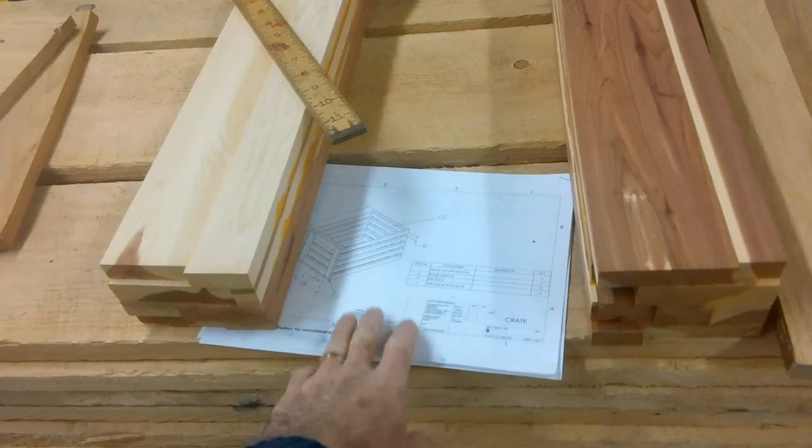We've got prints here for the crate we're building. I'll show you one of those in a minute. These are going to be cabs for the bulldozer. You see these have been planed down and laminated together. This happens to be some cedar that was donated to us. It's going to be really cool looking when we get it machined up. So those will be the cabs for the bulldozer.

If I run over here, more cabs for the bulldozer. These are finished planing, just like the other pieces were.

In our glue-up area, our clamps are all set. These are all glued up - these are the cabs for the tractor trailer. They just got glued yesterday afternoon. That student has more stuff over here, 4 more boards, all glued up as well. So that's coming along nicely.

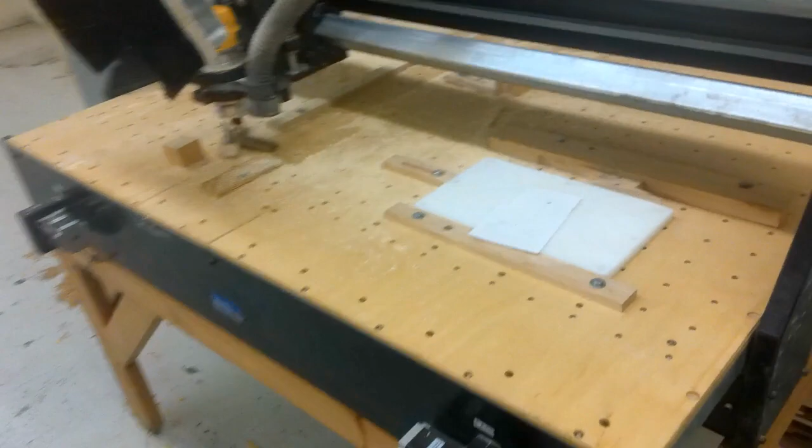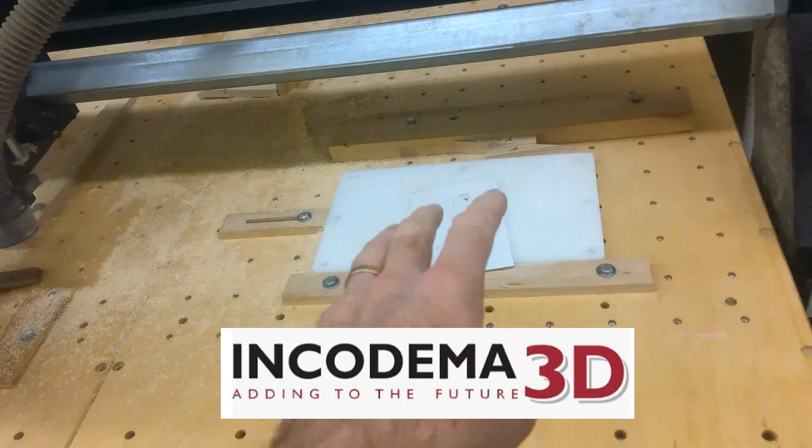If I come over here to our router, it's got 2 projects going at once. We have to do 2 different G54 offsets for our projects here. This project is a cutting board, something we do every year - we've been doing it for years. Incodema 3D in Freeville, New York gave us a whole bunch of this plastic, and we make cutting boards out of it. It's HDPE, food grade plastic, and it's just an amazing project, a really good introduction for CNC work.

My freshmen do this. We're right in the midst of programming that now. They should be machining later this week. On the other side of the table, the router is set up to make the wheels for our tractor trailer. There's 10 wheels per tractor trailer. I know it's supposed to be an 18-wheeler, but we've got to make about 160 wheels so that everybody gets wheels. So this is happening here.

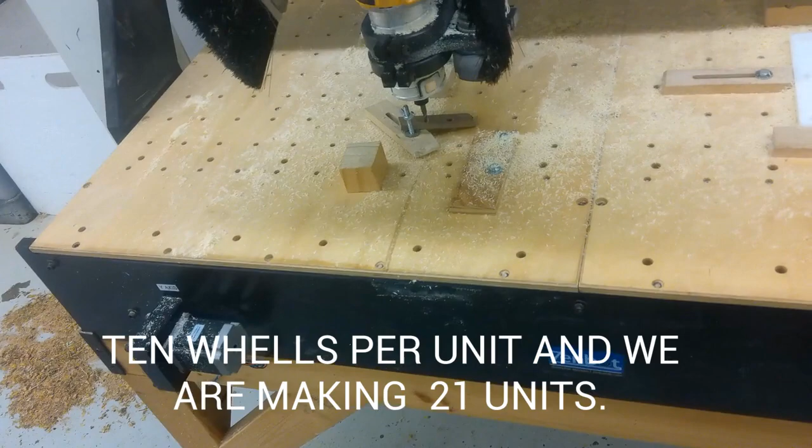We just made our first wheels yesterday. What we do, probably a bad process but it works well for us - we don't have a spoil board or a magnetic table, so we machine most of the way through, or halfway through. Right now our file's screwed up. We worked with OptiPro, they helped us yesterday with our post to get this to set right. It was actually part of our machine definition that needed work.

So this is going to get fixed. What we're going to do is machine about halfway through, a little more than halfway if we can, then finish it up on the bandsaw. It takes the student about 2 minutes to rough this out. Then we'll drill a hole in it - lay out and drill a hole. Once that hole is drilled, we'll make a jig or fixture for the sander and just clean up the edges. Works really well. So these are the wheels - that's our first one, 159 to go.

Pretty exciting. If I come over here, we're going to find other projects going on. I forget what this is - these 2x6s need to be machined down and planed down. It's going to be the back of the lowboy trailer. There's a step up on the lowboy trailer that has to happen, and that's going to be for that.

Here we've got some finished parts - these are pretty cool, these are bumpers. This was scrap wood given to us by somebody, it happens to be a piece of black walnut. So we have bumpers for the back trailer. We're going to use our laser engraver to engrave 'oversized load' in here. Hopefully that turns out well.

This is part of the trailer coupling for where the trailer is going to go. It sits like this on the trailer, matching the angle of the trailer deck. Then another piece attaches where my thumb is, which allows the trailer to go together as one solid unit. We've got our fifth wheel holder here.

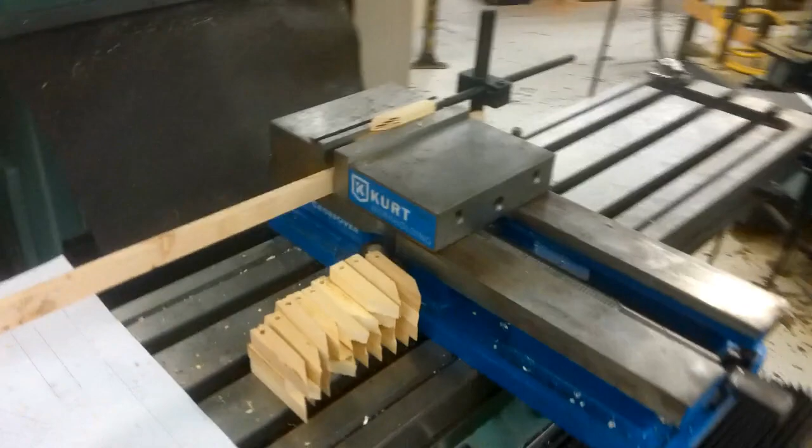Over here in one of our Trak machines, we set up this part - I forget the name - but it's moving along nicely. These are little brackets that'll go between the push arms and the blade of the bulldozer. He's drilling holes, then he's got a machine on a curve coming up next.

This is all scrap wood that was donated to us by Stakmore. Unfortunately, they're no longer in business. They were a great company, made all sorts of folding chairs. That was pretty cool.

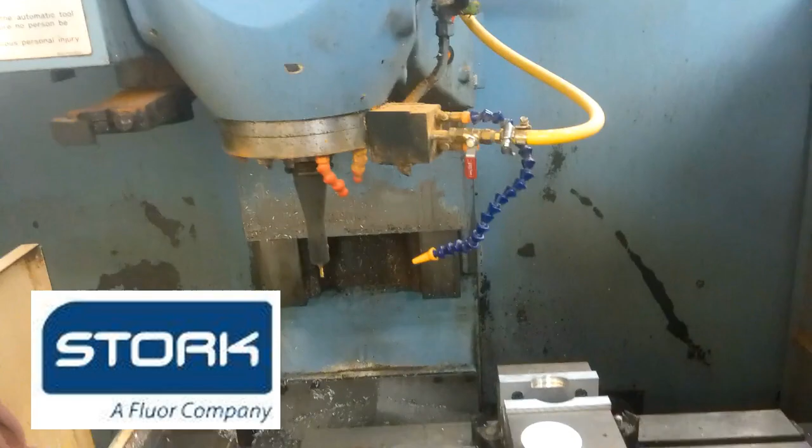If I run over here to our OKK milling machine, donated by Stork out of Ithaca, we got these discs that were given to us by a company in Lancaster, New York. Casey Machine Tool gave these to us - a whole bunch of scrap discs they had left over from a project. We're going to machine off the flat and machine a student's initial into this.

As you can see, the vise here has been machined out so it fits this really nicely. That'll get tightened in, and then we'll machine off the top, making basically some kind of paperweight with their initial in it. They can make more than one of these if they want - we've got a lot of that material.

We run over here to our manual lathe, one of our manuals. Oops, let's stop here first. This student's boring out a hole in a piece of half-inch aluminum, which is going to be the exhaust pipe for our bulldozer. This is one of the pieces that's done - it's got a hole drilled in it.

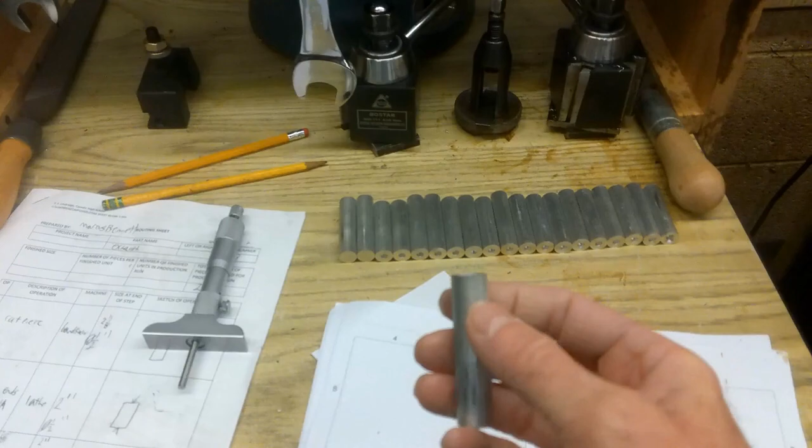All he has to do now is put it in a collet block, and we're going to machine a 45-degree angle on that to match our print here. So this is coming along really nicely.

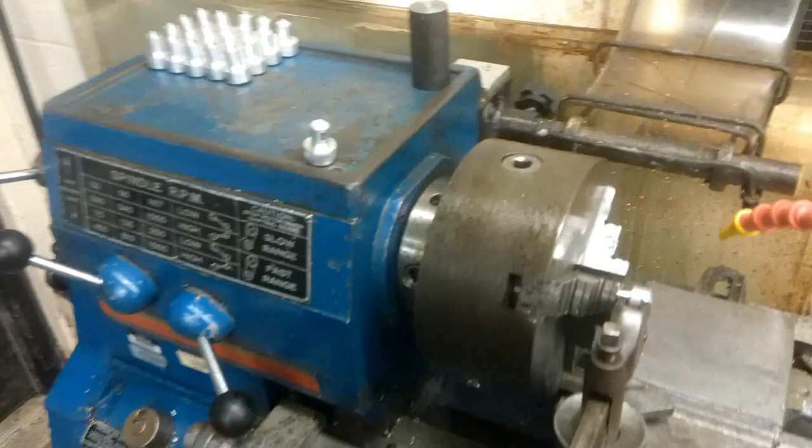We have another student that spent a lot of time on our CNC lathe - you saw that in another video. What he's done now is taken this part, our air cleaner, and he's knurling the edge to make it look like a real air cleaner. I hope this shows up on video. It's coming out really cool - he just finished the first one yesterday.

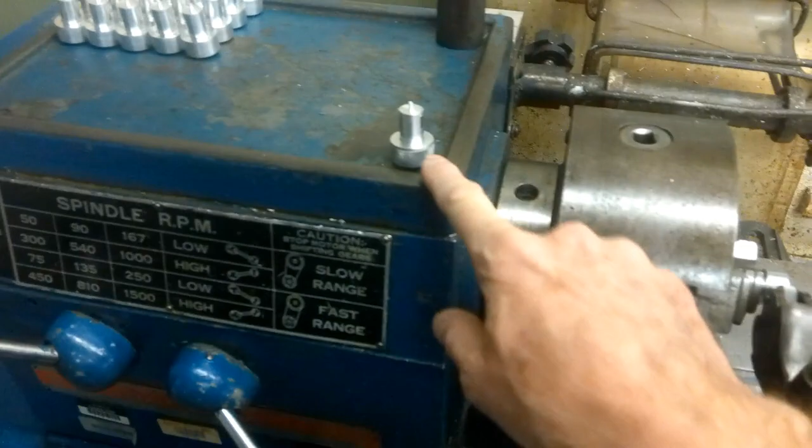Got a little tweaking to do. I was helping him with that and I messed up a little bit, didn't get our knurling tool square, but we're going to get that fixed today, and he's going to make a bunch of those today, I hope. He finished those on our CNC lathe.

Over here on our Milltronics VM24, the part's not in it right now. What this student is making, using this setup, is the right and left bulldozer tracks, as we're calling them. That's being done in this machine, and it's coming along really nice. We'll show you those in a minute.

This will be a 5th wheel mount - this little pile of lumber here. He just got these jointed up, so we're going to rip this and cut them. This is a rough length now, something that's easy for us to joint. It'll get ripped and then cut in half, and that'll become the 5th wheel, actually the gooseneck for the trailer.

So we're going to make a CNC program out of this to cut this out, so it's going to come out real nice. Over here, some of our scrap wood.

This is scrap left over from chairs we made last year, and we've got a whole bunch of it, so we rip out the defects and glue it together to make solid panels, then rip it into parts. These are slats for crates we're making. I'll show you one of those in a second.

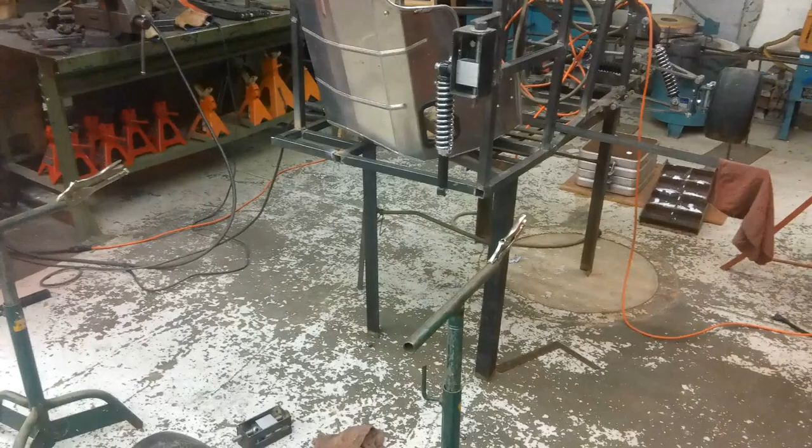Over here, our go-kart's coming along nicely. We don't see a lot of change, but there's tons and tons of work being done here. A lot of little layout, tweaking, and fixing—this is really coming along nice. I'm excited to show you the progress of that.

If I take a step past the go-kart into our foundry area, we just poured yesterday. You'll see a mold here with a small piece and a bigger piece in it. I think they came out really well. The pour went awesome yesterday, that was really good. So that's all done, and hopefully we can make progress with that.

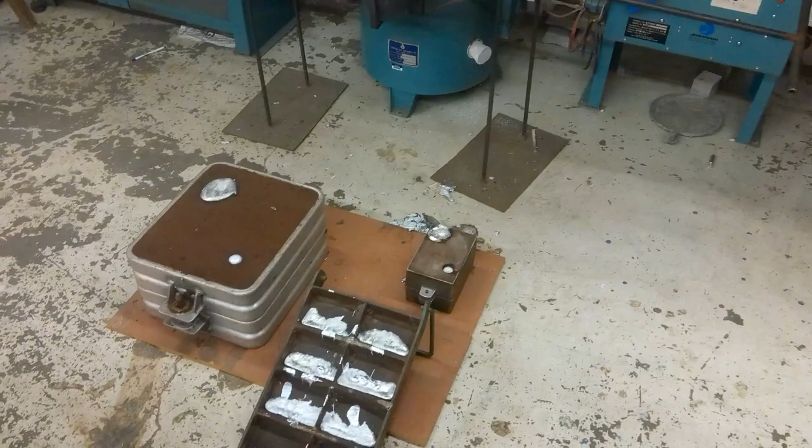If I run over here, our CNC lathe just finished up. You saw parts, the air cleaner, that just got finished up yesterday. Finished making those parts, so they're done, and it's moving along nicely.

Here's some more Stakmore chair parts. These little pieces right here are parts for the crate we're making. The crates we're making—these are 4 of them stacked right up. The only thing they need yet is the bottoms put in. Right now we can see right down through the bottom, but they'll have bottoms put in them. Same slats as the ones on the side here will go on the bottom. The part I showed you just previous to this are for these slats, and they'll just get ripped in half. They come out really nice.

Again, this is all scrap wood, stuff that we'd normally throw away, or it was donated to us. The frame here goes around the outside—that was lumber given to us by Stakmore. Stakmore unfortunately is no longer in business, but I really thank them for thinking of us and giving those pieces to us. It's made this crate a completely free project to the school, other than a little bit of glue and some air nails.

Over here you can see some frames being put together. So here's one of our end frames. You see our air nailer here, and some more slats, ready to go together. So these 2 pieces will be put together in a framework, and those slats will attach them.

Over here you can see that we've got a frame that's almost done—3 sides are done, the 4th side needs to be put on. There's 2 frames without slats. So things are moving along nice with the crates.

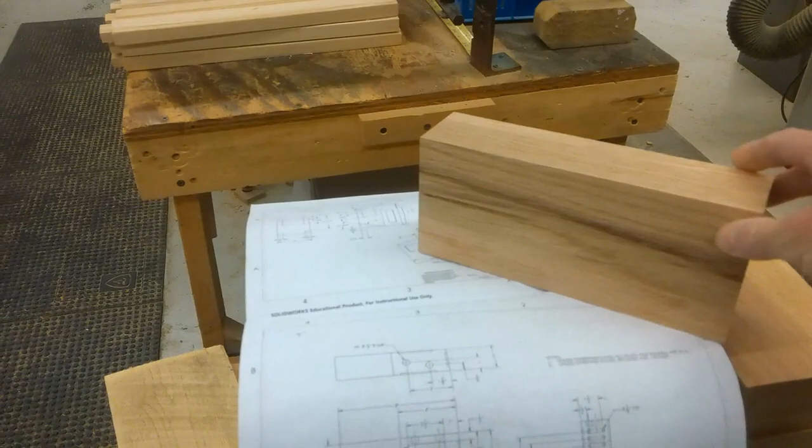Over here, these parts just got finished yesterday or the day before. These are rough stock for the engine for the bulldozer. So we've got a glue-up here—it's a lamination. This was scrap wood left over from the panels that are here, those study carrels from Ithaca College. They got ripped into boards like this. This is a glue-up, and this is going to be the engine for the bulldozer.

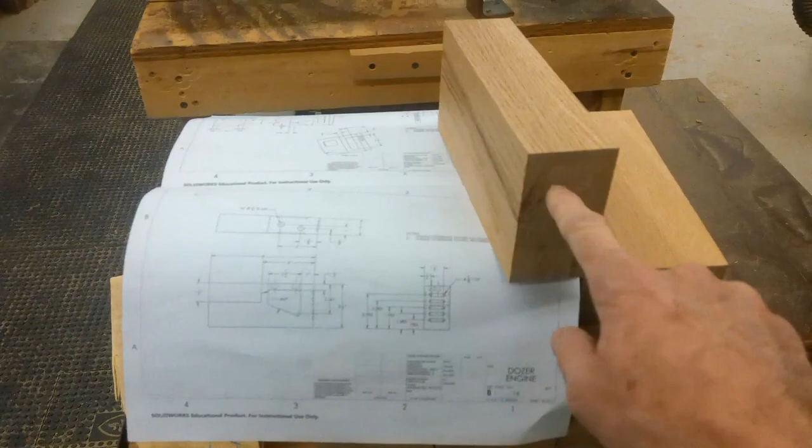There's the prints for it. Got a lot of CNC machining to do. There's the radiator to put in, and you'll see the motor over here, and the motor over here. Then we've got to make a cutout here to let the bulldozer cab sit in.

The cab's going to be made out of that cedar, so we'll have a red oak engine and a cedar cab. There's going to be some maple hydraulic tanks on each side. It's going to look really cool with the different lumber in the setup.

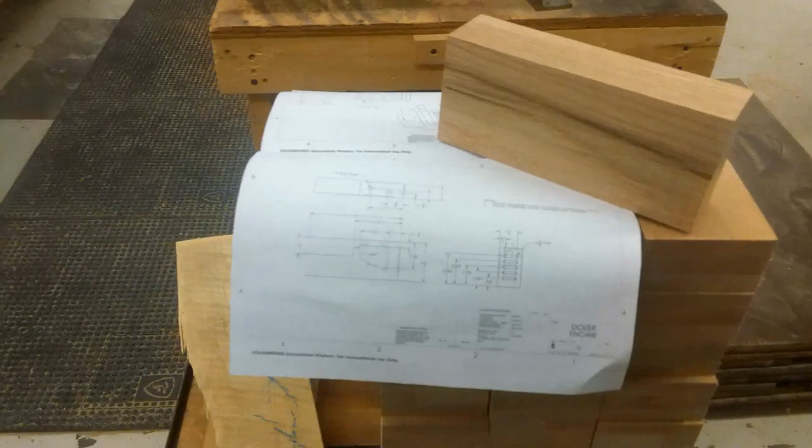One more stop, or two more stops I should say. Here's the left bulldozer frame, as you can see it's been machined. That was going on in our Miltronics, and it was really cool how that turned out—we'll try to get a video of it. This is the left side; we have to make a right side as well, and these are all getting machined in the Miltronics. Right now he's just touching up stuff with a sander, and we're going to finish up the faces of these hopefully today. They're coming along really, really nice.

Last project I'm going to show you, then we'll jump in and look at some architecture. This table is full of all the parts we need for our machinist chests—these are all the drawer pieces, all machined, again out of that study carrel stuff. We're able to rip out the defects and make those into parts. And that pile of wood on the cart, those are all the boxes, or the cabinet portion, of that machinist chest. They're coming along really nice.

There's another part here in one of our Trak machines. This is that 5th wheel frame I was telling you about that goes on the framework for the truck. What he's doing now is edge finding so he can find the center of a hole he has to drill, where the kingpin's going to sit. That'll get glued and screwed to the frame of the truck, and then the kingpin will sit in the hole. We're real excited about that.

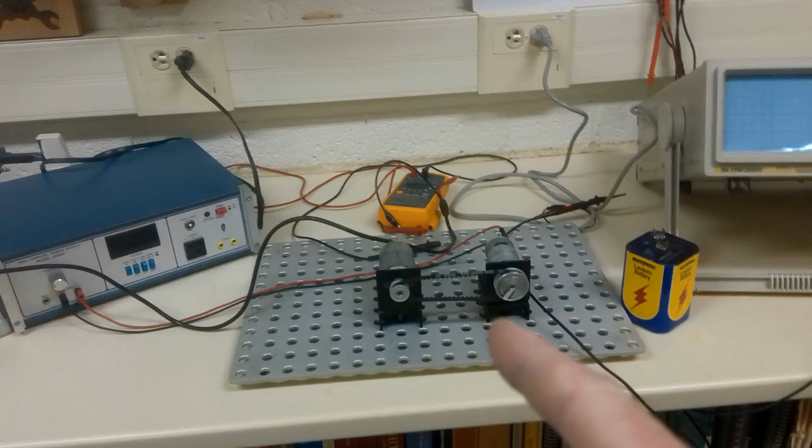Just yesterday in my applied physics course, we were looking at how electricity works and how electrical generation works. We took a power supply, ran it to an electric motor, spun a belt, and measured the output of that generator—basically turning a DC motor with another DC motor. We measured that output on our oscilloscope so we could see how DC power looks.

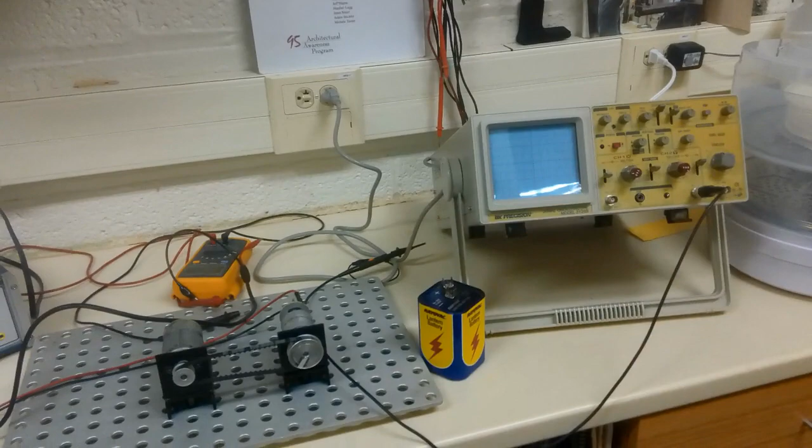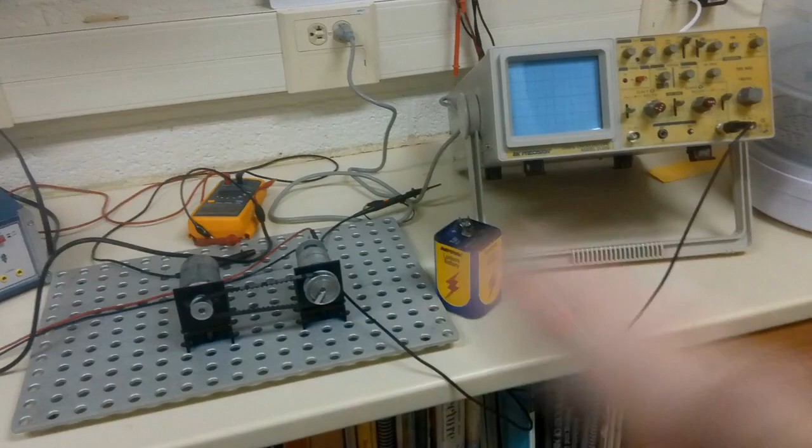It makes a really cool little bumpy line because as the magnet and the coil of wire spin together, it does that on the oscilloscope, which is really cool. We also used the oscilloscope to measure the voltage of a battery and see how DC voltage is just a straight line—it can be positive or negative depending on how it's hooked up or made. It's really cool how that works.

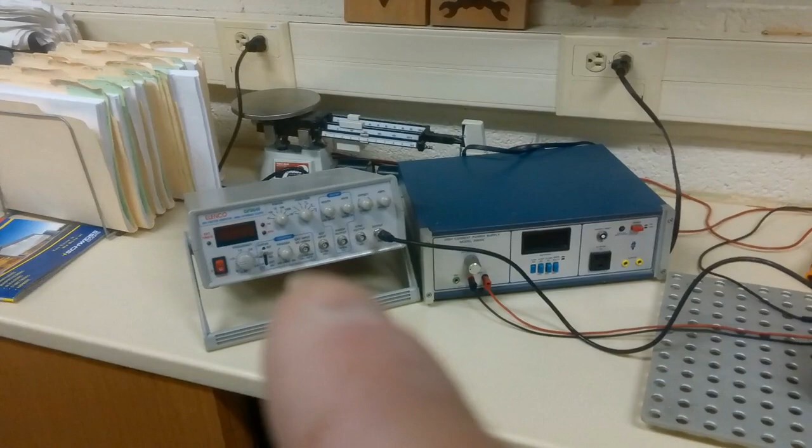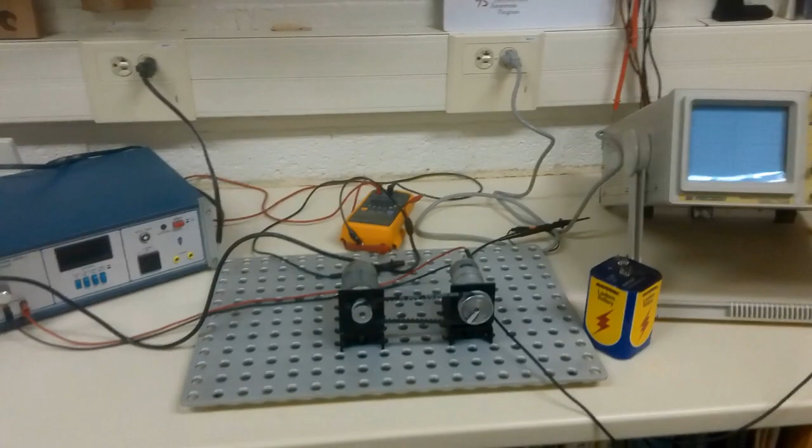We have a digital multimeter, and we also used our function generator to generate a 60 hertz sine wave, just like the electricity here in the United States, so we could see it on our oscilloscope and compare the difference between AC and DC. That's something we did yesterday in my applied physics course.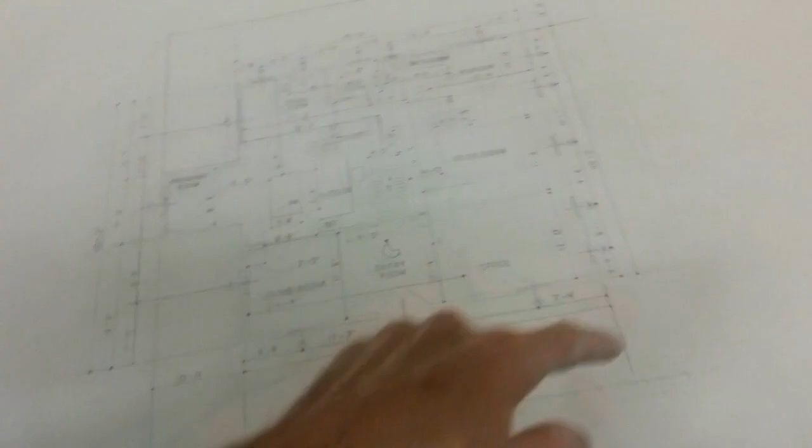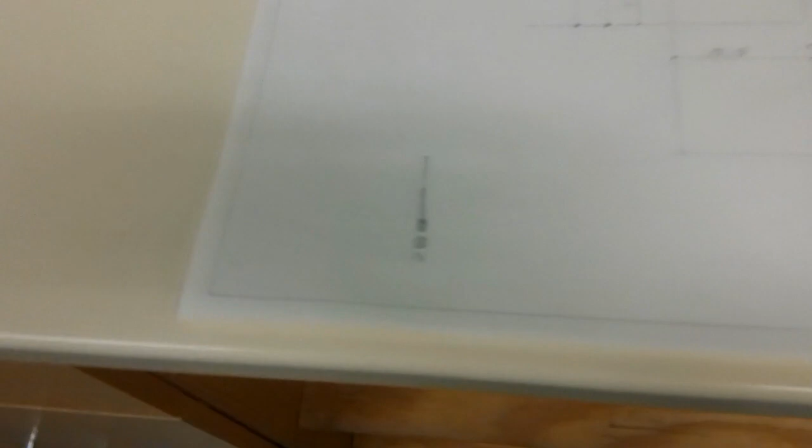This drawing is done. This student made a rectangular home with a wraparound porch that's under cover, so when she gets to the 2nd floor there's a roof that comes over. That'll all be done in CAD, but she's got all her dimensions in, all the door symbols done. I require ADA accessibility, so she has an ADA entry that's accessible, and a bathroom that's accessible too. This is really good work, and her north arrow is pretty cool—she's a big softball player, so she drew a softball bat and a softball pointing north. It's really cool.

All my students are coming along really nice, and all their houses are really cool. I'd like to show you all of them—that might be another video.